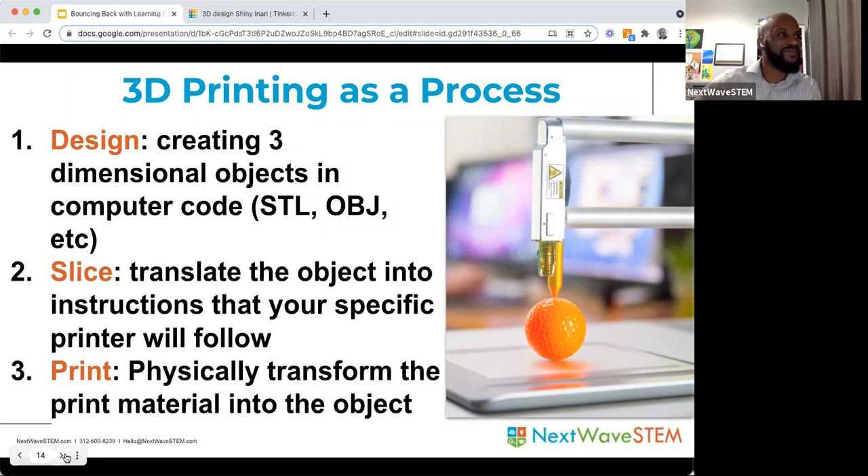So a great example that we can consider is a variable spring rate. And for this example, we're actually going to jump away from our slide deck and jump into a cloud-based 3D design software. Many of you may even be familiar with this particular piece of software.

It's called Tinkercad. Now, the reason we want to jump into the software is actually considering from a CTE perspective, the kind of flexibility that this software gives us and the basic design skills that allow our students to really grow in their skill sets.

Tinkercad is designed with 3D design and 3D printing from the outset. So a really important thing to understand with respect to 3D design is that our students need to understand constraints with respect to size and volume.

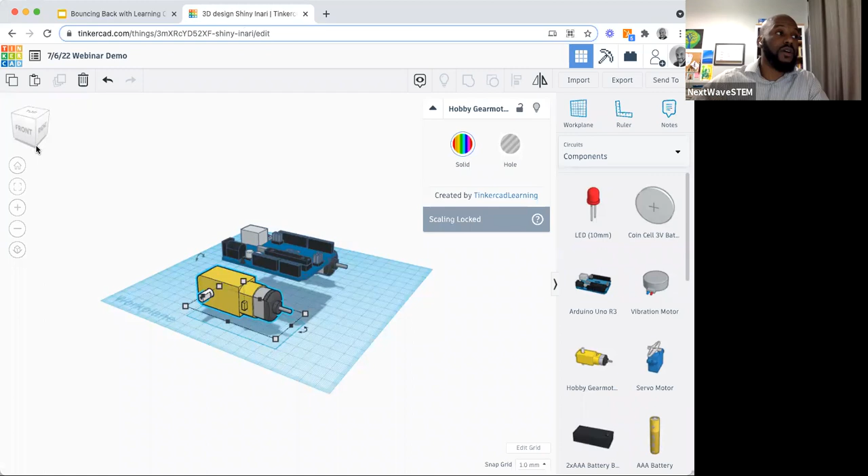What we have is a space in 3 dimensions that allows me to rotate around. And if you're familiar with other NextWaveSTEM programs, you might recognize this setup in particular.

In this setup, we see a very, very common microcomputer called an Arduino. This is a slightly different board that we use in our products and in our courses.

But the Arduino microcomputer is a perfect example of a programmable, low impact, low cost solution for students who are learning about circuitry and learning about coding.

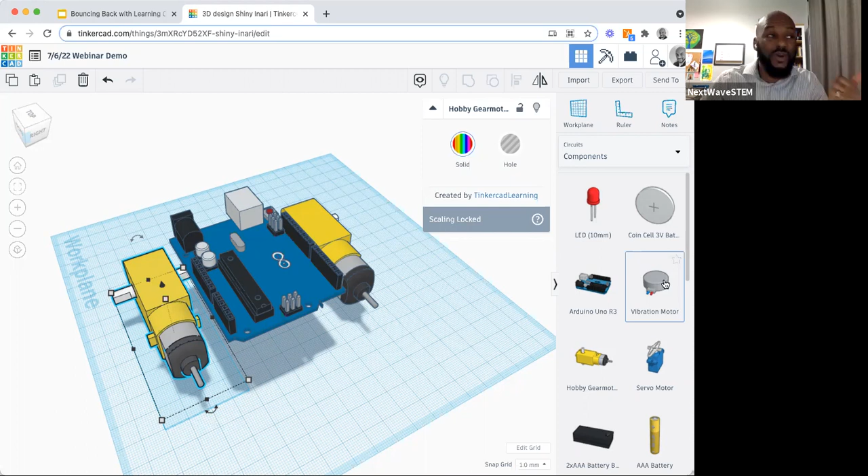That computer will be connected to 2 motors. In this case, our 2 motors would be driving wheels on our NextWaveSTEM robot.

So what we're seeing here is a 3D mock-up, an exploded, blown-out view for what we would find on the inside of a robot that we actually use in NextWaveSTEM courses.

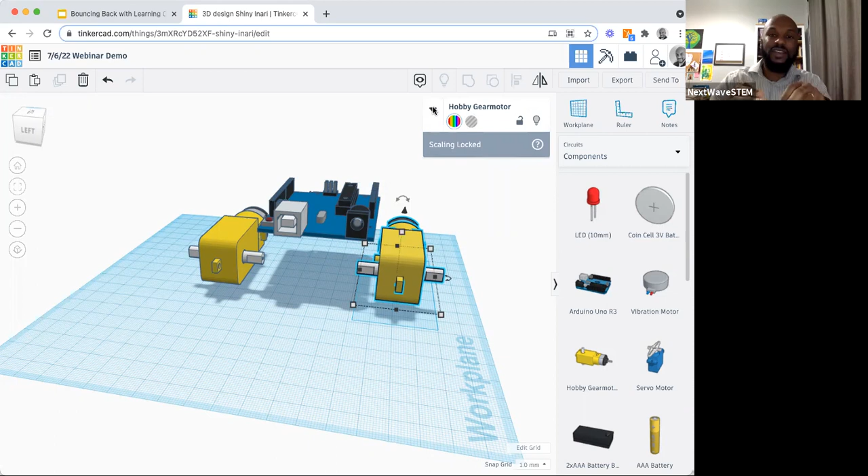Why is this something that we want to show? We want to show this because what we're seeing are actual parts, pieces, components, and physical considerations that students would need to take when designing new solutions.

If that's working in the manufacturing space or in the robotic space, computer-aided design starts there.

We're able to take common 3D objects that live in the technical space, Arduinos, and in this case, our gearmotors, and actually space them out.

I can pull these out and see specifically how big the space is that I'm taking up. In this case, it's 123.41 millimeters.

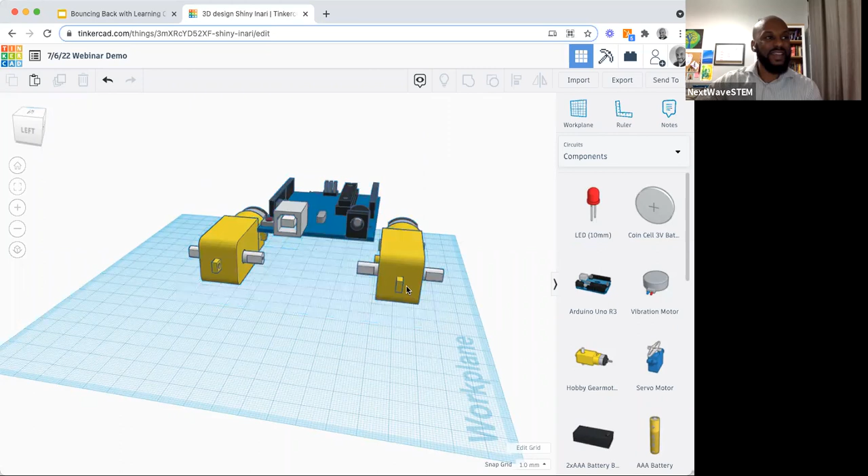If I want to adjust the amount of space this particular assembly is taking up, I can easily jump inside of Tinkercad and, using just a few mouse clicks, bring these motors much closer together, much like we would see on our actual MBOT.

This may be the difference between dollars per unit. It may be the difference between hundreds of dollars for a small production run or thousands of dollars for a larger one. In the long term, it could save a corporation tens of thousands of dollars in materials, packing materials, shipping costs, tariffs and fees, just because of the slight changes we've made to our objects in 3D design before ever putting things together.

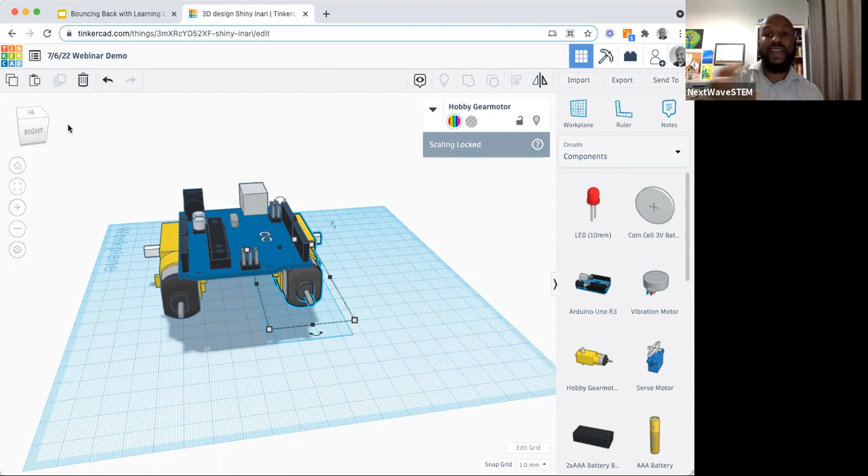And that's just basic skills, enabling us to rotate around in design space and look at an object from 3 dimensions, just to make sure things are packaged and fitting really nicely together.

Now, another skill our students will engage with in CTE space is the actual definition of parts.

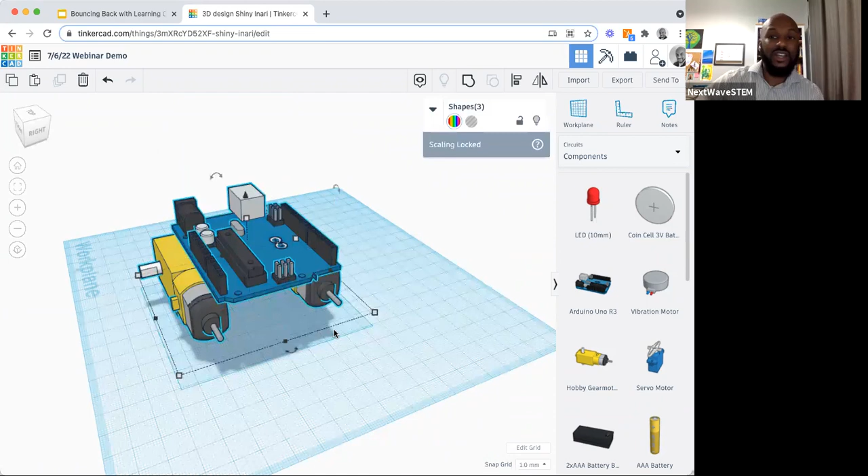In our Tinkercad space, we're able to focus on really basic shapes. This particular tool in the 3-dimensional design space is designed for learners starting as young as 3rd grade, all the way up to as young at heart as you'd like to be.

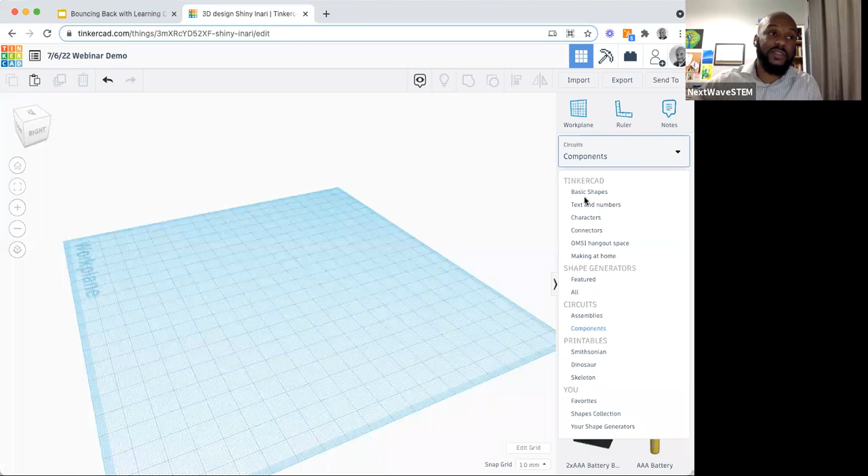It combines lots of different categories and ways for us to think about objects in 3-dimensional space, whether that's in the architecture and interior design space, things like actual interior design seating sections. This is a collaboration between Tinkercad and the Oregon Museum of Science and Industry.

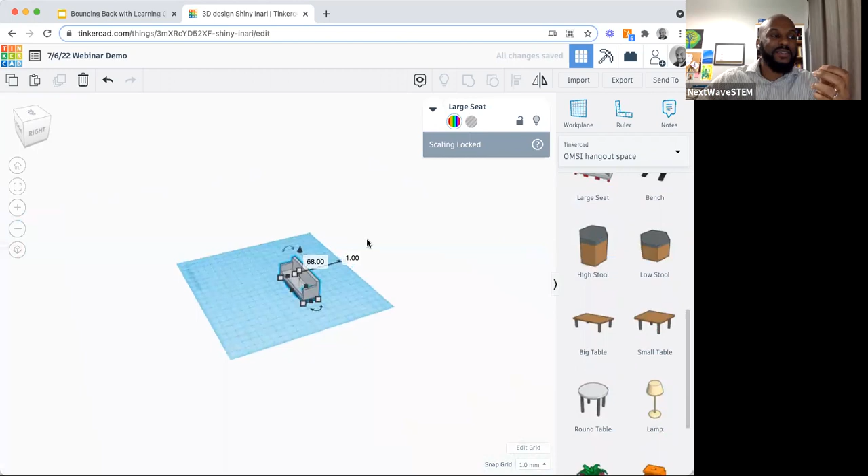You're able to pull in some design space elements and do design that way, or delete that bubbly looking sofa and focus on some other things.

In the case of the pandemic, we may have had our younger students removed from classroom household materials, and things like popsicle sticks, cardboard tubes, or even pencils become something we can access in 3D.

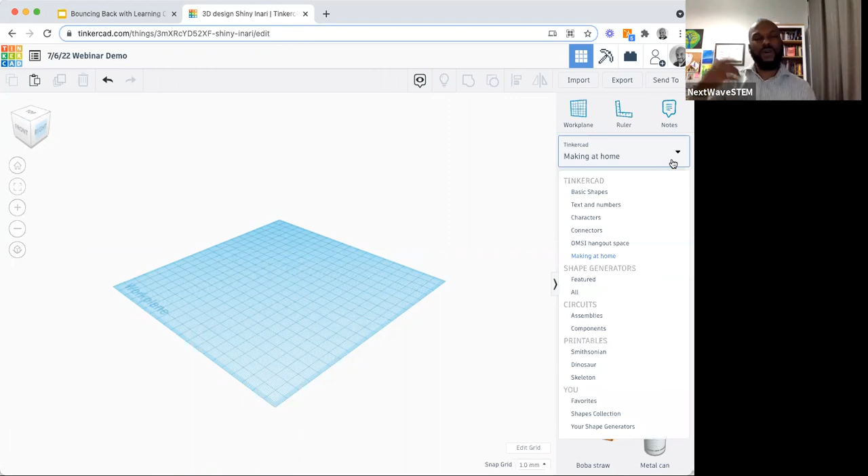But what becomes really powerful for us is the ability to generate specific scientific shapes inside of Tinkercad. For example, I might be really focused on teaching my students about machining.

As we're learning about machining, we may be learning about fasteners. Sounds like a particularly boring subject, except for the fact that almost everything you've ever used that's more than one piece has to be fastened together. If I'm taking one material and attaching it to another to make a more complex object, I've got to figure out a way to have these things stick together.

And glue is great, but glue and adhesives are not necessarily the best long-term solution from an environmental standpoint or a user standpoint, especially depending on the materials. I, for one, would not like to use cookware that's been glued together as opposed to using fasteners.

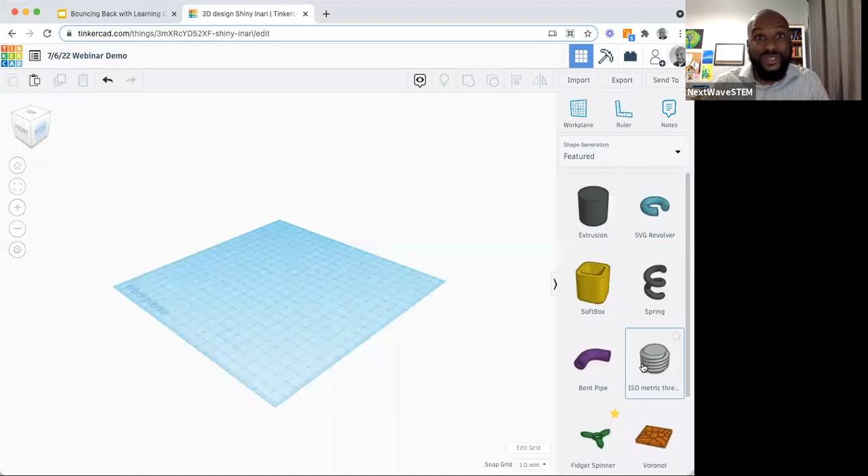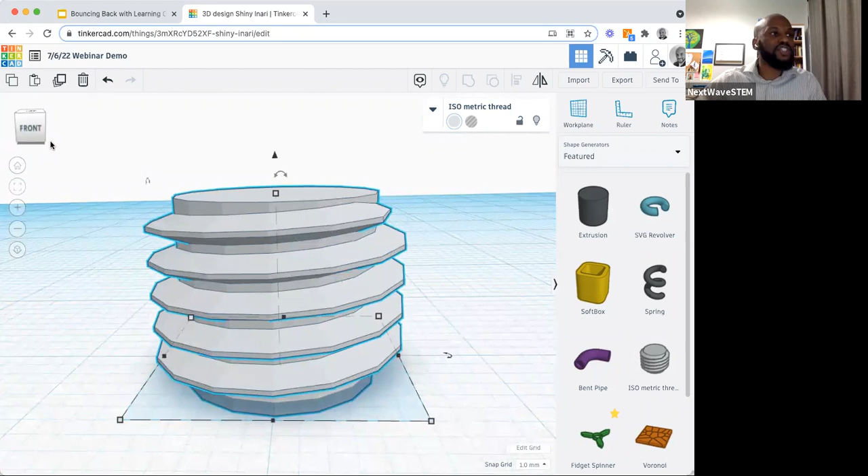My students, me and my students, and your students remotely, might pull out an ISO metric thread unit. This is an actual International Standards Organization metric thread for any fastener—think a screw or a bolt.

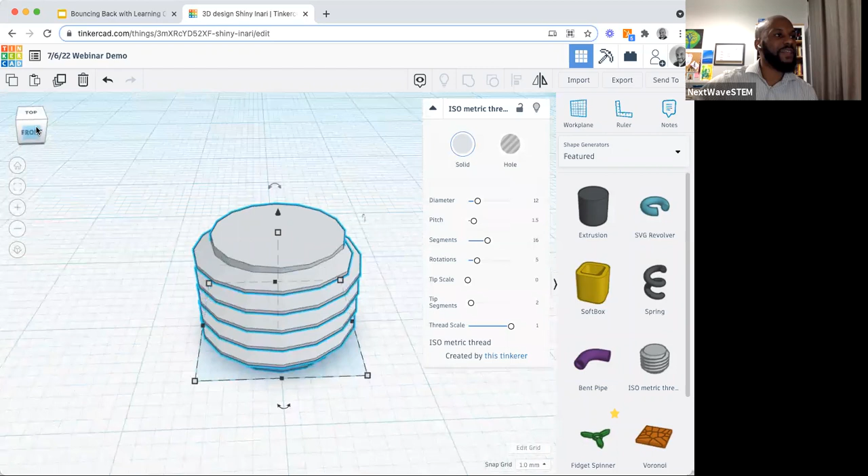And what we can do is actually customize specifically what this fastener should look like. So what do we mean by that? Well, if we get a slightly better view of our thread, we can do things like adjust the actual diameter of this unit.

I might be working with a really thick kind of bolt—this might be a nice, important engineering application. So let's say I might have a bolt that's 16 millimeters wide. You can see I'm actually just typing those numbers into the inspector, and the thread is snapping where I want. I want this bolt to have really aggressive bite.

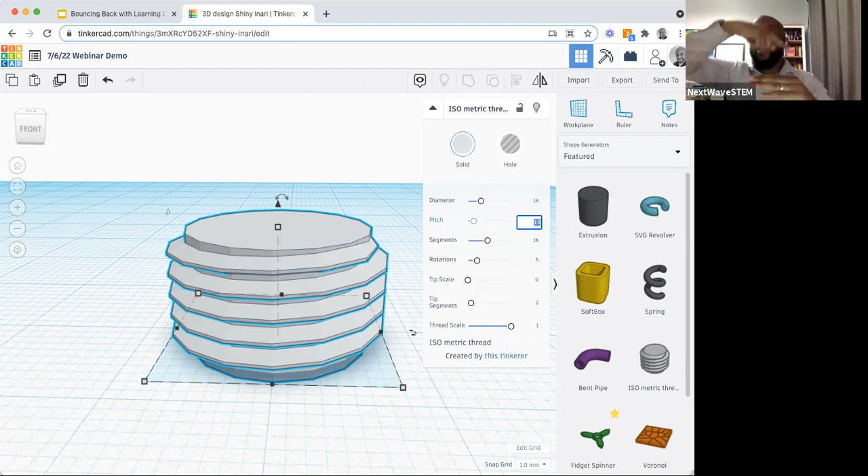So I'm going to change the pitch, the actual angle at which the thread points as it spirals down the shaft of this bolt. It's not a really shallow 1.5 degrees, but instead I might go a little more aggressive—let's go 3 times as aggressive and do 4.5 degrees on the pitch.

And we'll see, after a slight calculation by Tinkercad, how thick this thread has gotten—really aggressive change. We've got the same number of rotations in the section. The entire thing is 25 millimeters tall. It's a really thick piece already, almost looking more like an auger, something you'd use to drill a hole.

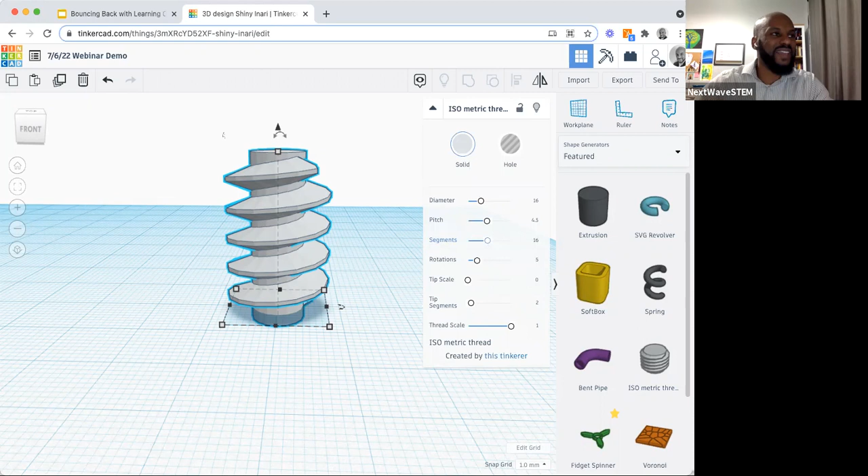And there's 16 segments, but maybe I want to increase the number of rotations. So I'm going to slide and make this nice and big.

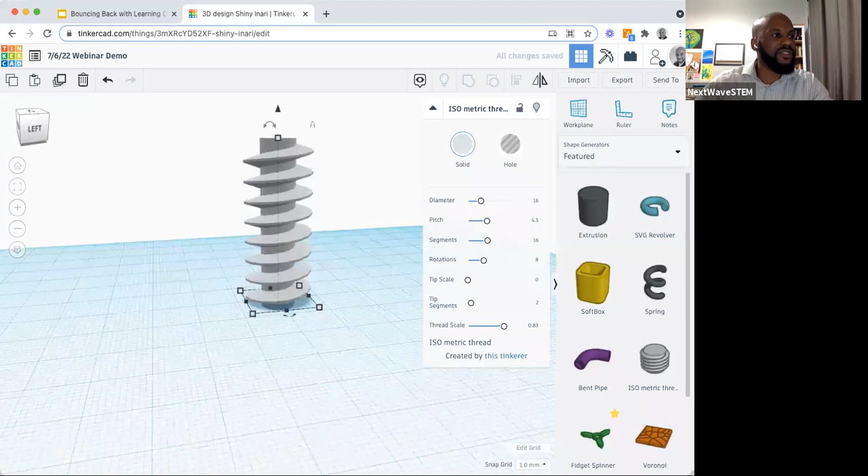And now what I can do is actually decrease the thread scale, making them nice and skinny. I want to make them a little bit taller now. You can imagine that an accompanying bolt, something that's really thick, would be able to hold even a large bridge up.

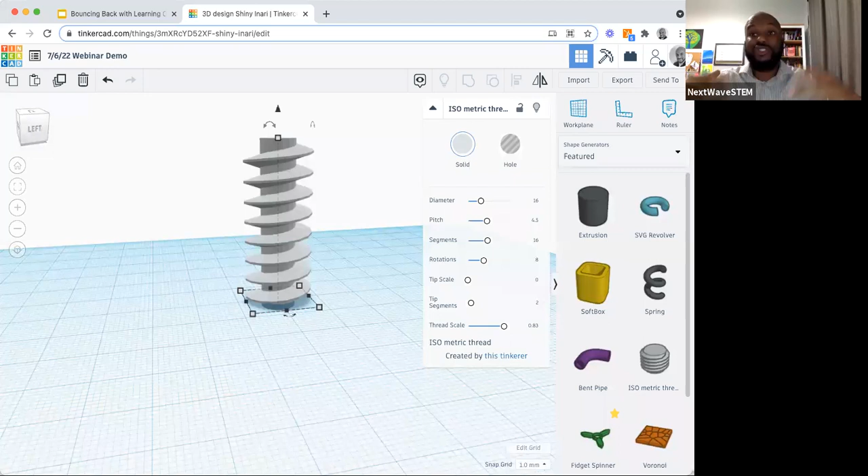But without focus on any particular technical specs or actual application, this is all theoretical right now because we haven't connected this to the materials we might use. This is just the starting point, being able to build specific shapes inside an online editor to allow our students to grow in their understanding of design skills. We've only used some basic tools, just dragging and resizing shapes, changing the alignment, or rotating the view and measuring accurately. But as our students continue to grow, they'll gain other skills that become integral to 21st century skills.

Generative design is the idea that artificial intelligence will fill in some of the gaps, teaching the computer how to design an object that does what we want it to do from a stress perspective, a heat perspective, considering the materials and how the physical environment the object will be used in will change over time. We can actually design parts and pieces that use less material and perform better than we might have been able to ourselves.

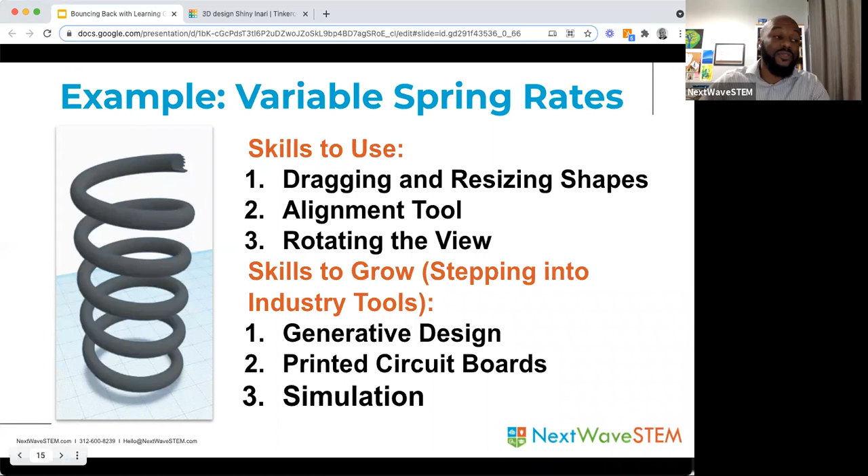More and more, we're going to lean into the space of actually printing circuit boards. Some of us may have heard of the shortage of computer chips that's making it hard to get a laptop or a cell phone right now. Designing the next generation of computer chips will be something our students will be able to do in 3D first. And of course, simulation, being able to simulate what a 3D printed object looks like and how it will perform in the real world, becomes critical as well.

So that's all fine and good to simulate designing, but what about the actual physical printing of an object itself? What can we do to make that applicable for our students and help supercharge their learning, help them bounce back and get more gains even in the summertime?

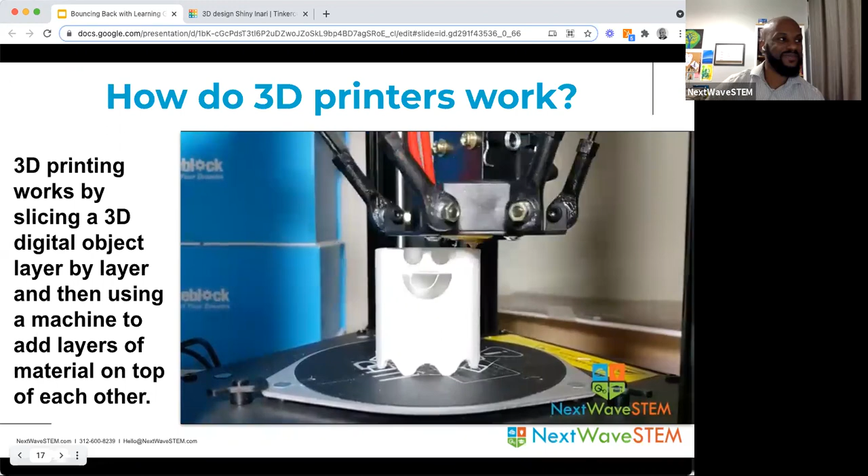In your case, your students have more options available to them than you might have imagined or ever had before. For one thing, 3D printing at home is a legitimate option for many students. When we think about desktop printing, for our students who have a little bit of extra space to carve out, we're thinking about a low-cost piece of equipment that will allow them to build all kinds of transferable skills.

Many serviceable, workable 3D printers—students have the ability to access those for the price of a new gaming console or less. This is something that once upon a time was multiple thousands of dollars for students to access, and now in the hobbyist space, our students are actually able to get in and get hands-on with the technology at a really low cost. When our students are working with this kind of technology, there are limits in the capacity, volume, and the kind of materials they can use for a printer designed for desktop use.

But really, many of us are familiar with what's happening in our actual schools and career centers—our technical spaces, shops, and maker spaces designated for 3D printing. We get the amazing benefit of guided instructor support and hands-on real-time teamwork. Students who work with STEM are going to be working in teams continuously, all the time. That's how we do our STEM work in the industry.